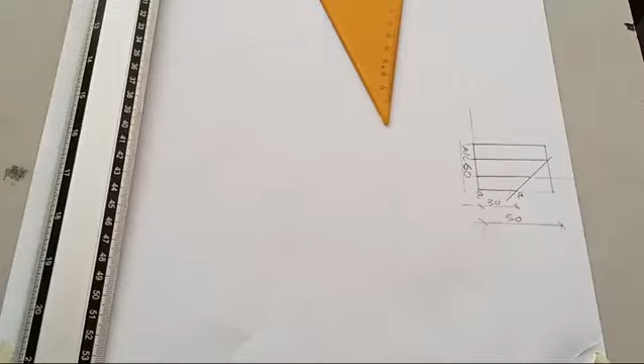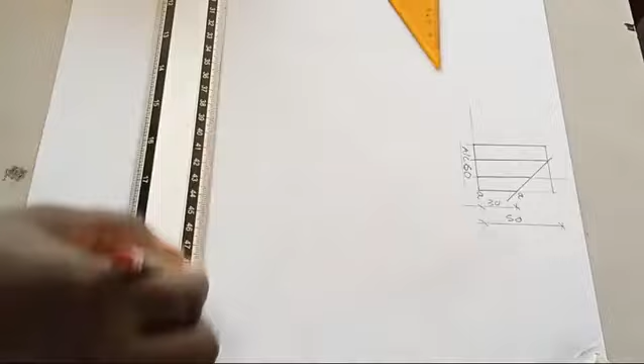In this video, we will be solving a question on surface development of a frustum of a prism. You can see it is cut this way, and we have been told that the seam is AA, meaning that we will be starting drawing from this way and develop this way, because our seam is here, so you can develop this way towards the right.

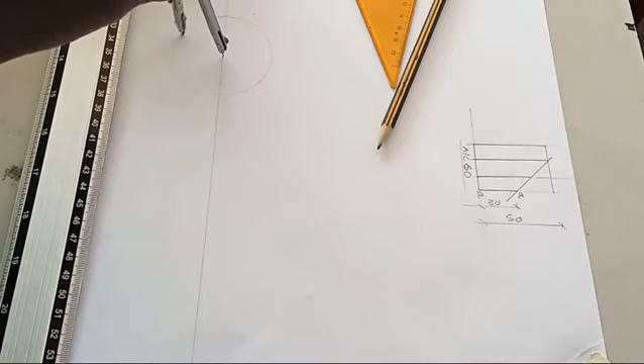So we'll start with the plan. The distance across corners is 60, so you measure radius 30 on a compass. Just pick this point, 30. You have to be very careful so that you stay here now. You mark arcs above and below. Stay on this other side, above and below. Now you join.

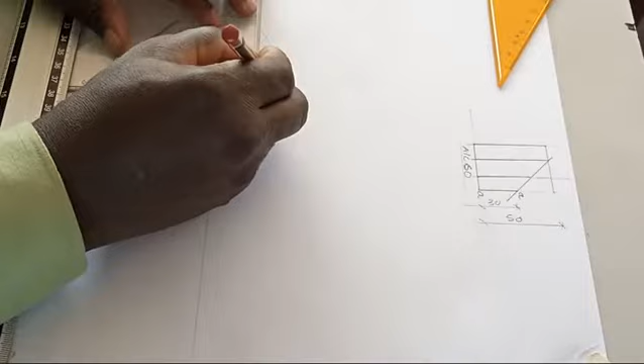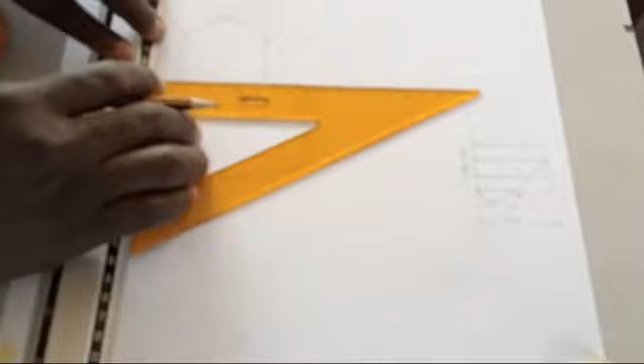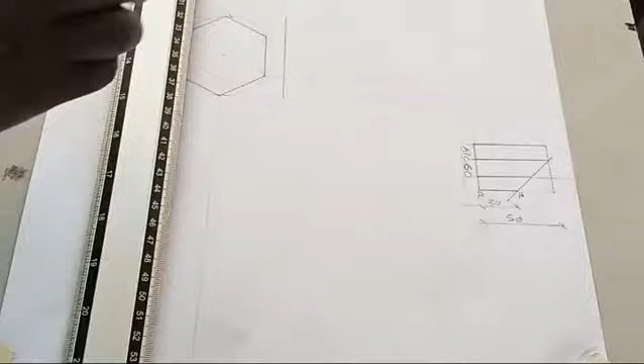To get your hexagon. This is what we are doing now, drawing the plan of the hexagon. So we are done with that, so we can now draw perpendicular lines, vertical lines from the corners. So let us draw a horizontal line for the base. We can put it somewhere here. Let it be as close as possible to the plan. Now you measure the height.

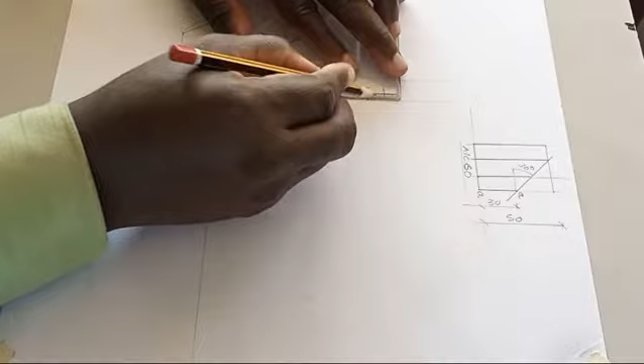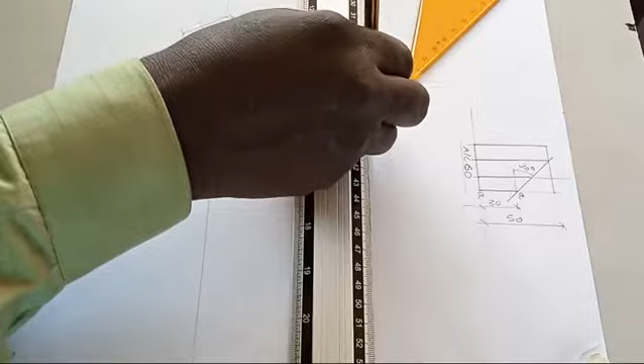This angle is 30 degrees. So you measure the height. Total height is 50. Measure 50. This is 50, and the point of cutting is at 30. It is here. These are 30 here. So you can now use your 30 degrees set square to do this. That's the cutting plane. And put your vertical height, the total height at this point. So the cutting plane is cutting it at this point.

So it's not cutting by the side. So be very careful of that. You have to make this place a thick continuous line, because all these points are edges, and the edges have to be in thick continuous line. Like that. So that is our prism. So the next thing now is to develop it.

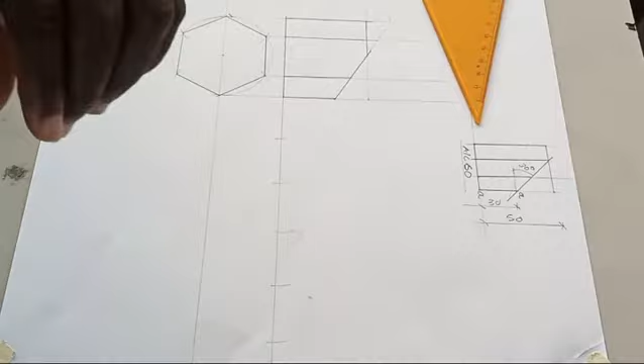Extend the base and mark this side 6 times. Can we have 6 here? 1, 2, 3, 4, 5. It's entering into this side again. Just do it properly. 1, 2, 3, 4, 5, 6, like that. So you draw vertical lines from all those points.

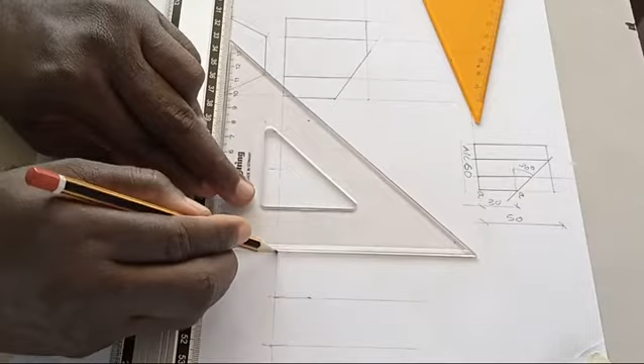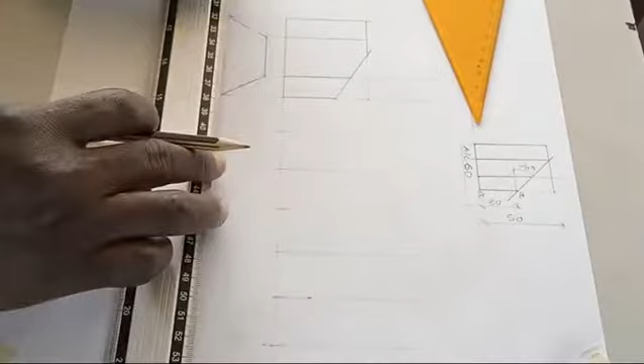This, this, this, this. The reason why we have divided into 6 parts, 1, 2, 3, 4, 5, 6, is because our hexagon has 6 sides, so we have to have 6 here. Now let us take the top. That's to the end. Now our seam is here. Don't forget, write it A, and that means you are starting your number from here.

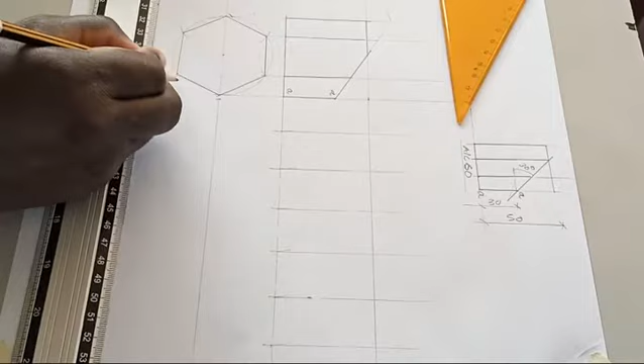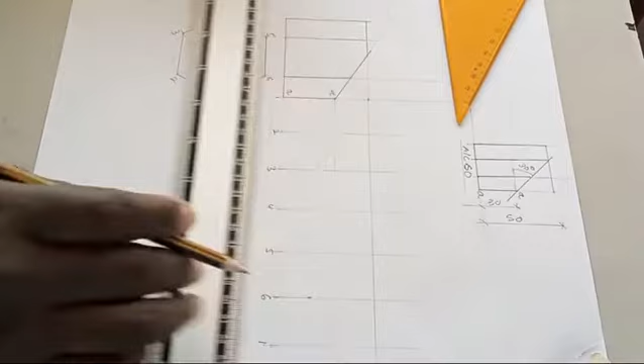Let's say this is 1, 2, 3, 4, 5, 6, and this place will be 1, 2, 3, 4, 5, 6, 1. Now 1, 1 will be from here. This is 1 here, and this is 1 here. Now the next one is 2. We have 2 and 6 here. All these 2 points, we don't need to do anything there because we did not cut them, so we leave them the way they are.

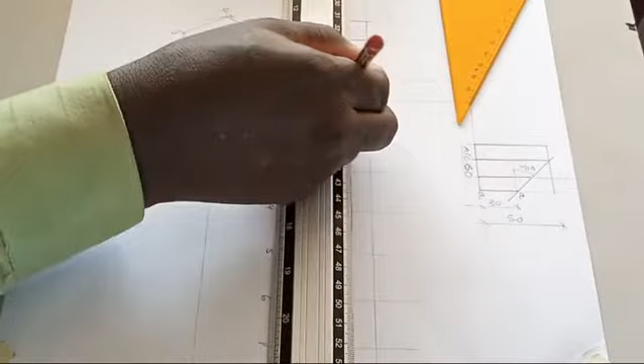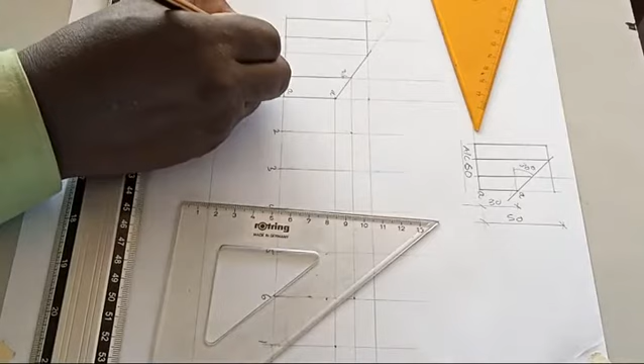So you go to 2 and 6 like this. This is 2 here, and this is 6 here. So after this, there's also a point here that is this edge. You have to create a point for it on the plan like this. Let's say this point is 5 prime and this one is 3 prime.

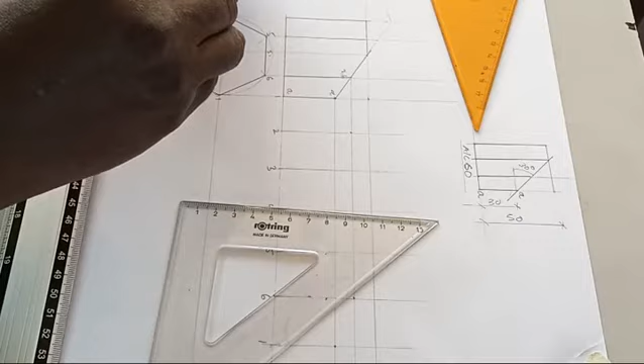If it is 3 prime, now you come to this place, you are doing 3, you either do 3 to 3 prime, or you come here and do 2 to 3 prime. If you do 2 to 3 prime, that is 2 moving towards 3. You come to here, this is 2 moving towards 3. This is where you put it. You place it on this side. So that's what we do now. So 2 towards 3 like this, and it will be the same thing here.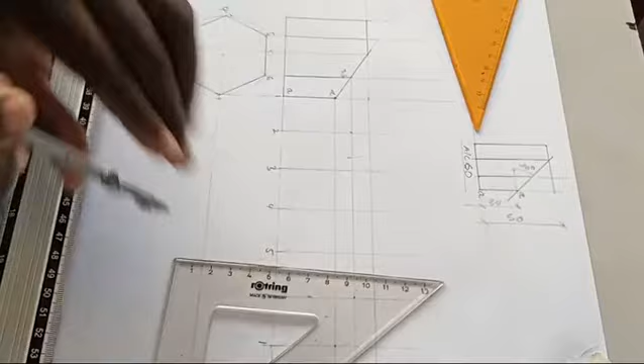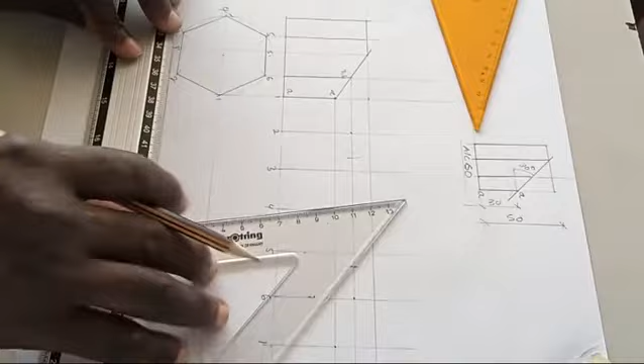That is 6 towards 5. You come here like this. Again, we did 2 towards 3, so you put it on 2 towards 3. Similarly, 6 towards 5, you put it on 6 towards 5. Now the next thing is you will draw a vertical line at those 2 points, this one and this one. So that's where you now have this point here. This is point 3 prime, and this one is point 5 prime.

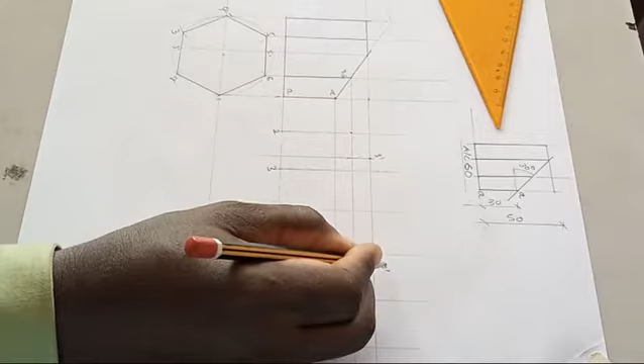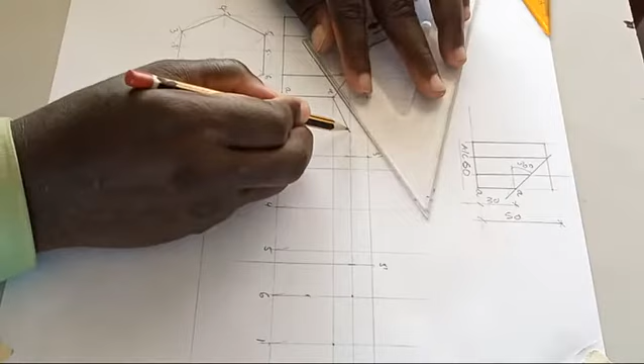So this is 1, 1, 2, and 6. Yeah, so you now join from 1 to 2. It goes from 1 to 2 like this. 1 to 2, then 2 to 3 prime like this. It goes up at the top because it is at the top that is meeting it. The same thing here, 1 to 6, then 6 to 5 prime, like this.

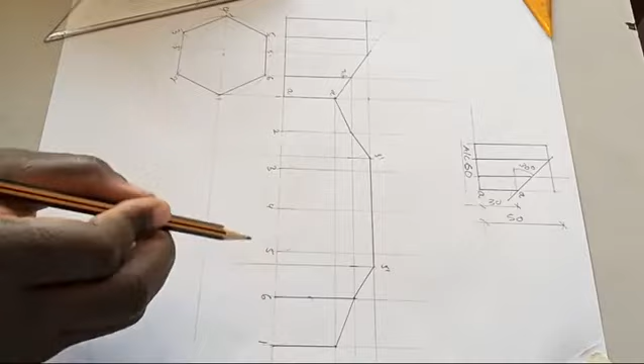So the whole of this part will be drawn in straight line because you did not cut this portion at all. So you now make all the edges thick lines. This point you don't need to make a thick line because there is no edge along this point. It is 5 that we have thick line. 4 thick line, 3 thick line.

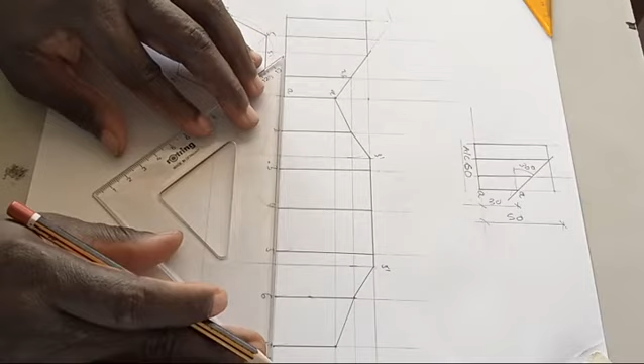At 3 prime there's no edge there, so you won't make it thick line. 2 thick line, there's an edge. You can see this is 2, there's an edge there. And the base, you connect the base with thick continuous line. So that is the development of the given frustum of a hexagonal prism.